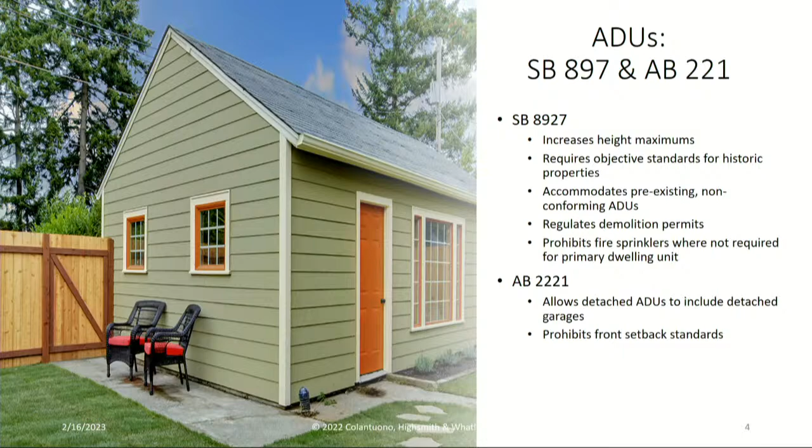Density bonuses. There wasn't actually a lot of amendment, I don't think there was any amendment to the residential density bonus. However, the legislature did reenact an expired provision, which is the commercial development bonus. So the residential density bonus is 65915.5. This one is 65915.7. Like I said, it existed, it expired, and now that we've reintroduced it, it also has a sunset provision in 2028, so it's also set to expire.

To qualify, a commercial developer must directly build affordable units, donate land for affordable housing, or make cash payments to an affordable housing developer. So now they're trying to get commercial developers to get in on the build lower income housing game. If they do that, they can get certain bonuses on their commercial development: for example, a 20% increase in max intensity under the general plan, a 20% increase in max allowable floor area ratio, a 20% increase in max height requirements, and other variances from the zoning ordinance and land use regulations.

The problem, as pointed out by the Legislative Analyst's Office, is that in the prior iteration of this, the one that expired, according to HCD, only 5 units were actually built under this law. So no one seems to be using it, and this new law that was reenacted is almost a carbon copy of the old one. Everyone's curious to see how this is going to be any different than last time around, but it's on the books.

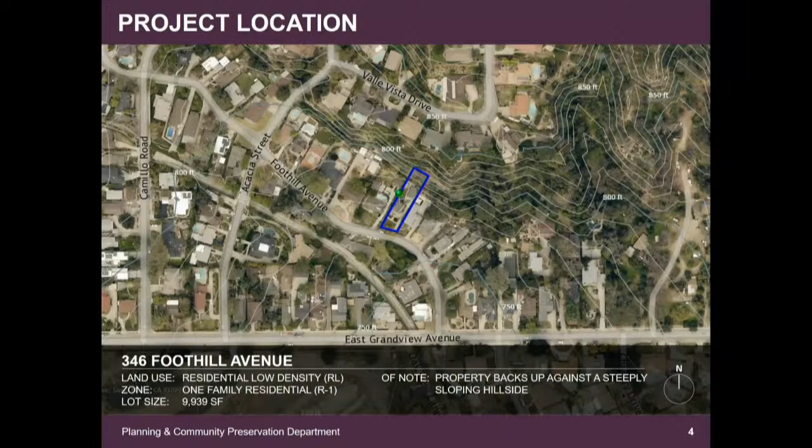Just a closer view on that hillside there, you can see there is a difference, 780 feet to 840 feet, approximately 60 feet increasing towards the adjacent property at the rear.

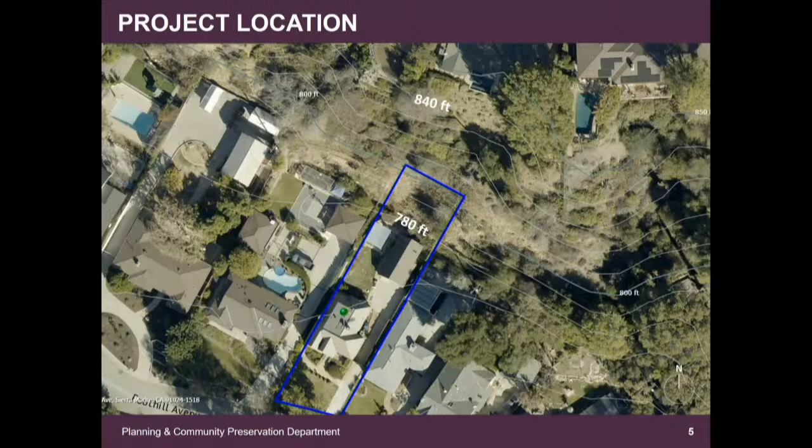As far as the summary for the project data, the design does propose a height of 29 feet 6 inches. This is down from 30 feet, which may be allowed with approval of a design review permit. But I want to note that this is a height measured from the lowest point of grade to the highest point of the building. So the height measured per code, which is from the lowest point of grade to a point one-third the roof height above the top plate, is 21 feet. This is up from 20 feet 9 inches, a very nominal amount.

This height does meet code as its method of measurement is as prescribed, because it is less than the 25 feet height limit. The proposed gross floor area of 3,206 square feet is down from the prior 3,222 square feet. It does not include the ADU of 558 square feet, which is permitted per government code and now city code.

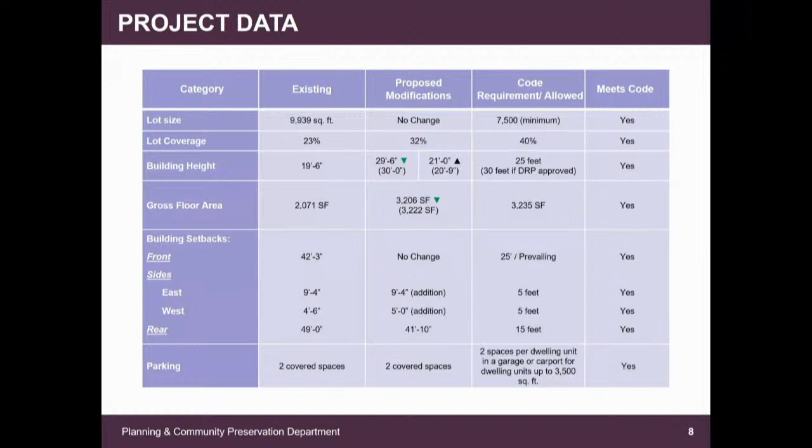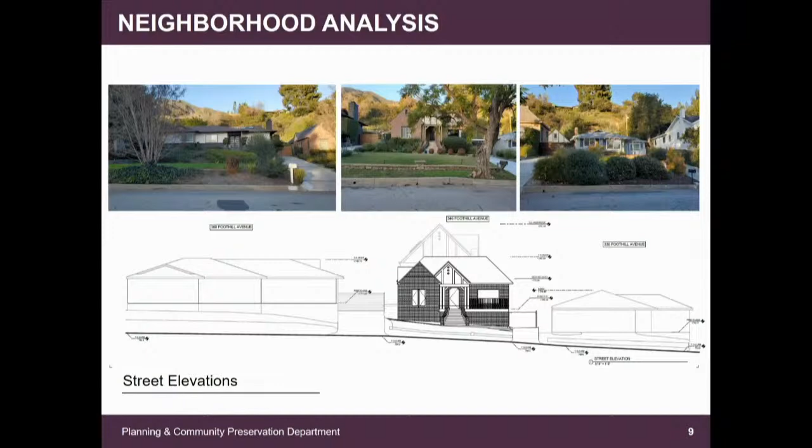There's further neighborhood analysis here. I asked for an elevation at the street, comparing neighboring structures at the street on Foothill Avenue. You can see on the left here is the neighboring home, above it is its photograph, and to the right of that is the other home on the other side, its massing and its photograph. There are additional photos of the neighborhood, included in attachment E of the agenda packet.

Moving on to the neighborhood analysis, comparing assessable floor areas. The building size is represented as habitable area as provided by the LA County Office of the Assessor. The subject property proposes a gross floor area, less the non-habitable area, of 2,753 square feet. That ranks it 6th in terms of building size amongst its neighbors, which is below the average of the top one-third and below the median of the top one-third.

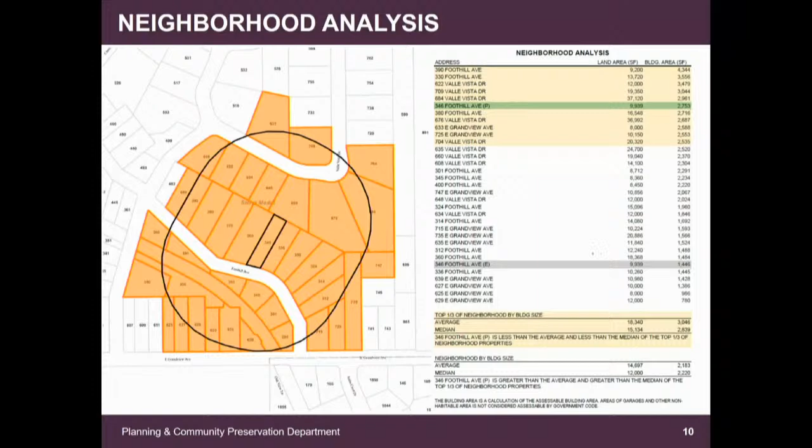Moving on to the existing site plan and topography. Highlighted here in orange is the area proposed for demolition and grading. The back 40 feet of the property is steeply sloped hillside, roughly 80% grade. Between the back of the garage and a chain link fence is a flatter raised terrace. West of the garage, the grade becomes much more gentle at an approximate 13% grade. This grade continues through the front of the property.

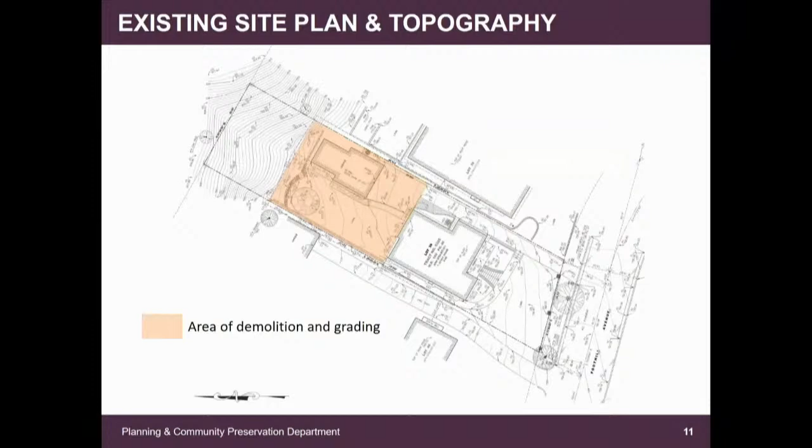I believe those arrows are conveying existing drainage patterns, but following my presentation, I think the applicant would like to clarify that.

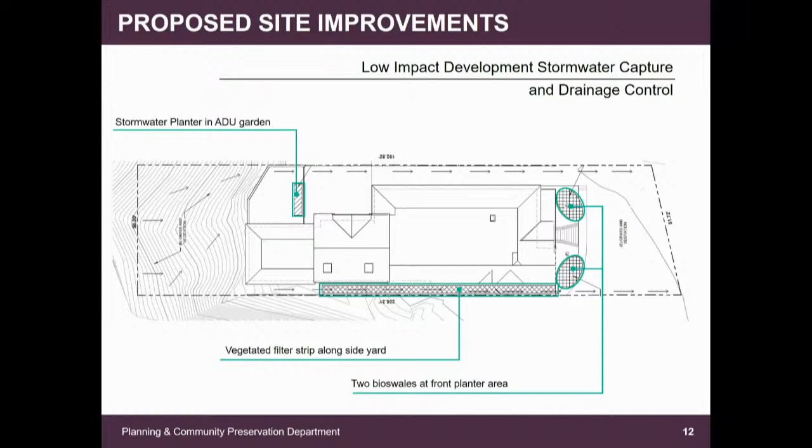All right, moving on to the demolition plan. This is exactly the same as it was in its prior submittal, where highlighted in orange is the demolition at the rear of the building of all those walls except for the southern exterior wall on the 5-foot side, and all the roof planes to be demolished.

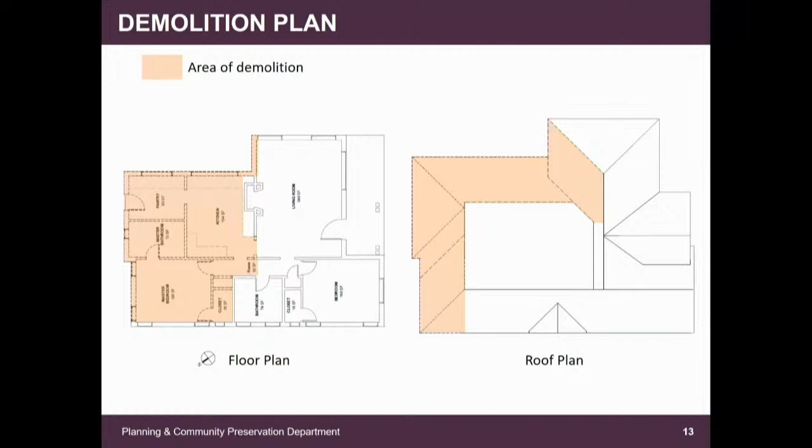Then a proposed site plan to the building footprint. Highlighted in green is the areas for addition. Those areas encompass a ground floor expansion of 739 square feet to the primary residence, a second floor addition of 595 square feet, an attached garage of 426 square feet, an attached ADU of 558 square feet, and a basement of 624 square feet, totaling less the ADU and the basement, 3,206 square feet.

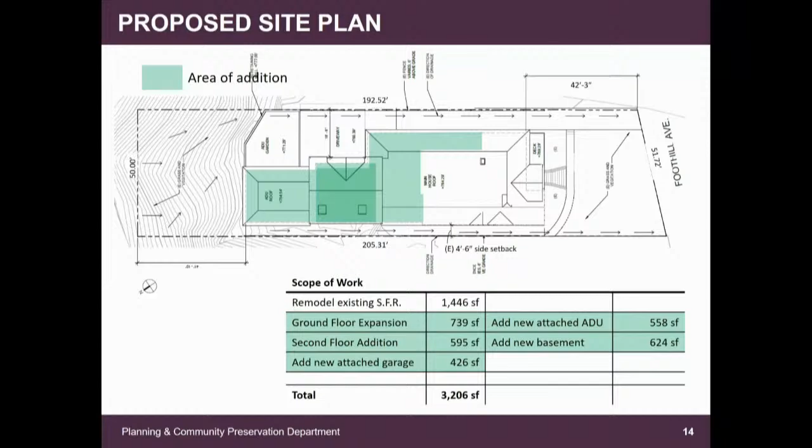This is just shown for reference. This is the previously proposed first floor plan.

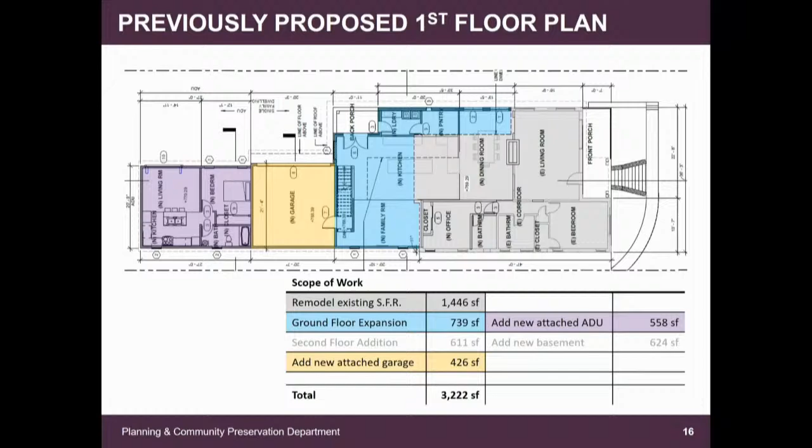Moving on to the second floor plan, we see that highlighted in blue is the 595 square foot portion. There's a little hatching area along the side portion. This is area with a floor to ceiling height less than 7 feet 6 inches, and thus not captured by gross floor area count. Additionally, the area of the stairs is already captured in the first floor, so it's not counted twice. In this floor plan program, there is simply a primary bedroom with attached bathroom and closet space.

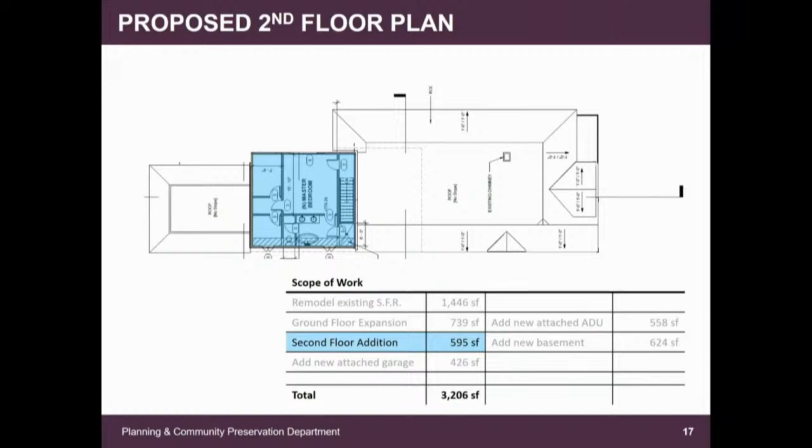Furthermore, the difference here in the new proposal is there's no roof deck anymore. So that's eliminated compared with its prior submittal.

Okay, moving on to the basement floor plan. This one hasn't really changed much in terms of its size, but its programming did change. We'll see, just because the way the stairs had to be reoriented, now the wine room and the storage areas are in different places. This is the previously proposed layout with the mechanical room and the wine room on the side end. In the new proposal, this has just been shifted in towards the front.

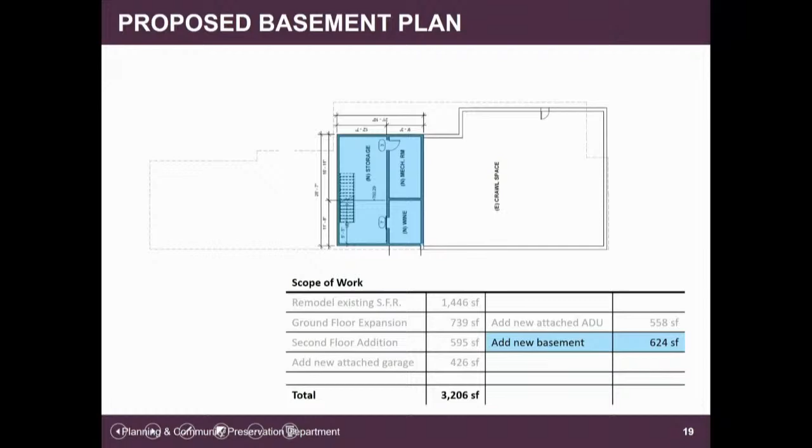Moving on to section elevations. The section on top of the slide is the proposed design with the western half removed, looking in at the eastern half's interior. Because the property is sloped at an approximate 13% grade, required angle plane is demonstrated for each of the sections below, showing that the proposed design falls under the required angle plane. You see that on the slide with the red lines that start vertically up 10 feet from grade and 45 degrees in.

Section number 2, cutting at the garage, demonstrates that the code-prescribed method for measuring height up to the first one-third of the roof height above the top plate is at 21 feet. Ceiling height in the second story volume is 14 feet. It's continuous with the interior ridge of the dormer, and interrupting the height of the interior ridge of the main roof with ceiling and structural ties.

As mentioned before, the ceiling height of the first floor addition measures 14 feet, primarily due to the ceiling terminating at the flat portion of the hipped roof.

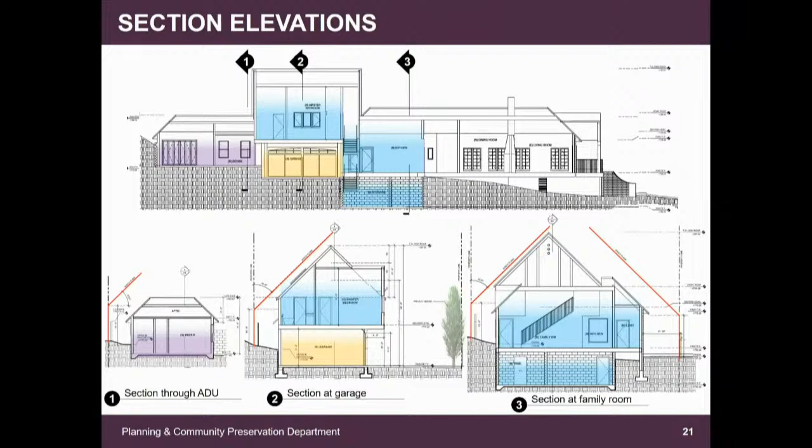There are very subtle differences in the other sections here, but I'll go over that a little bit later.

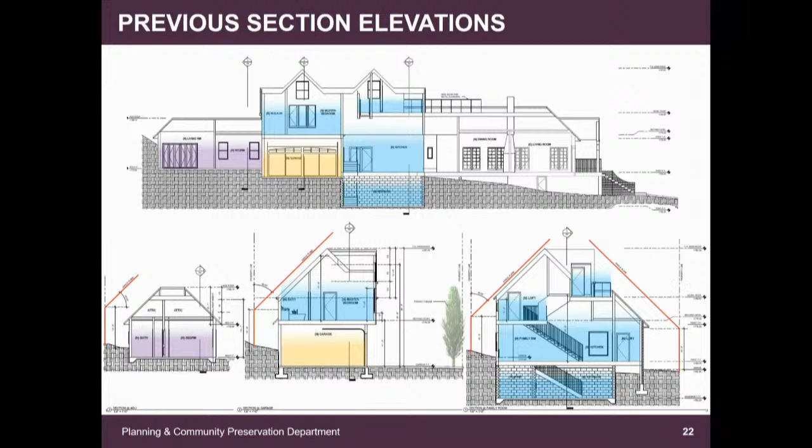Moving on to exterior elevations, one of Planning Commission's concerns was the second floor dormer shown here in the lower part of the slide, which intersects with the first floor and roof deck. That area has been addressed by eliminating the dormer along with all the building mass that projects towards the front. As you can see here, there's only one dormer, and it is standalone, not intersecting with any other building portions.

Additionally, you may notice that the roof massing of the ADU has been reduced in kind, more to the massing of the existing structure. So there is the previous, now proposed, more in proportion to the existing.

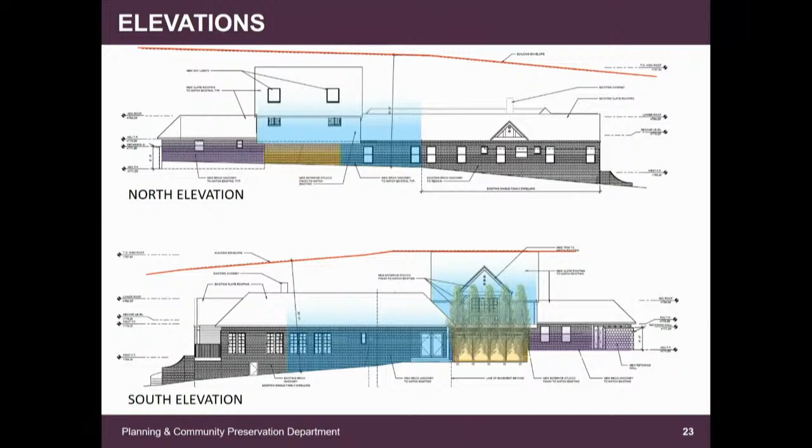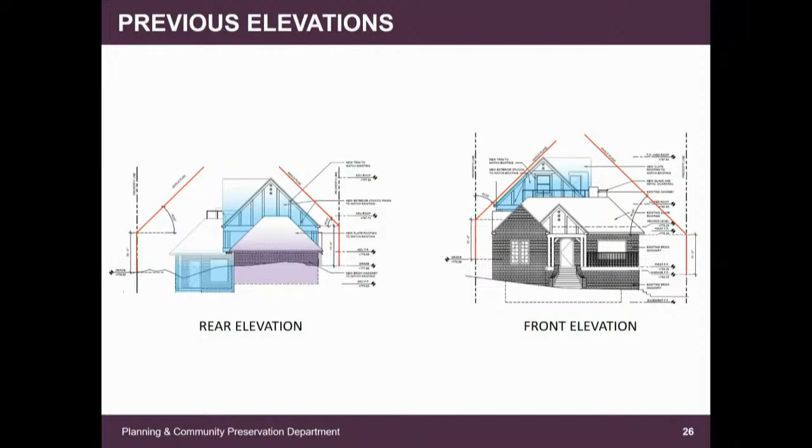Moving on to materials and colors, this has stayed the same since its prior submittal. The roof material will be a gray slate roof, matching the existing. There will be architectural timber Douglas fir treatment to match the existing, vintage red brick cladding, also matching existing clay architectural features for gable vents, anodized aluminum gray dual pane windows, and off-white troweled stucco cladding to match the existing exterior and color.

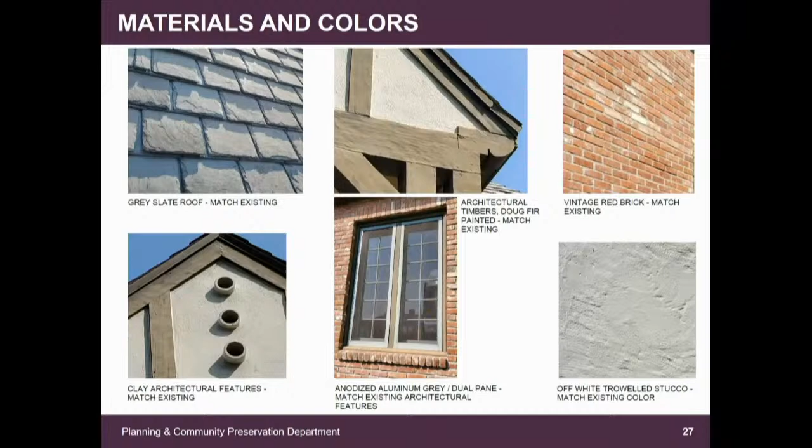Here are some further details of the windows and doors.

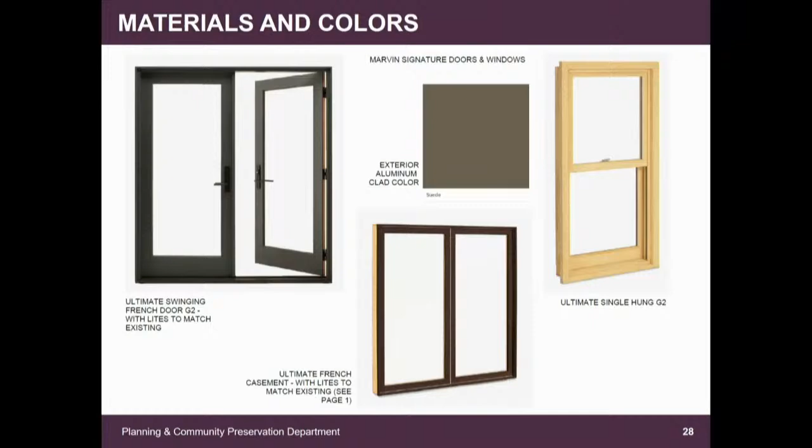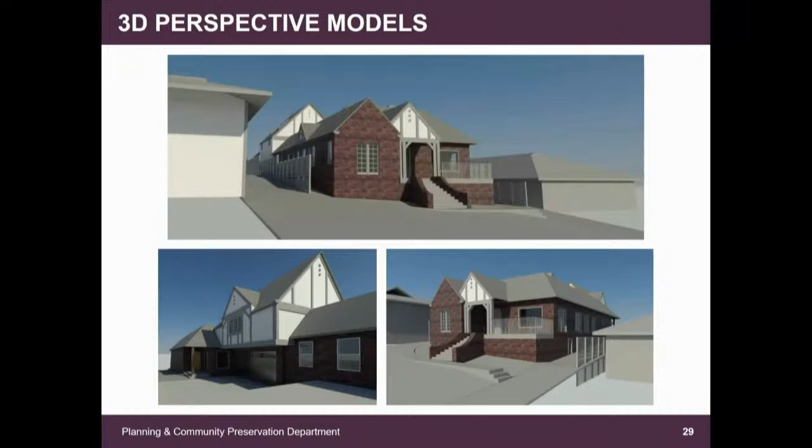Moving on to 3D perspective models, on the top of the slide is a 3D perspective model viewed from the street slightly north of the property. The lower left is up the driveway looking towards the front, viewing slightly towards the addition. The lower right is again the front, but further south on the street.

Moving on, we have some aerial perspective models that you can see the roof and massing from above.

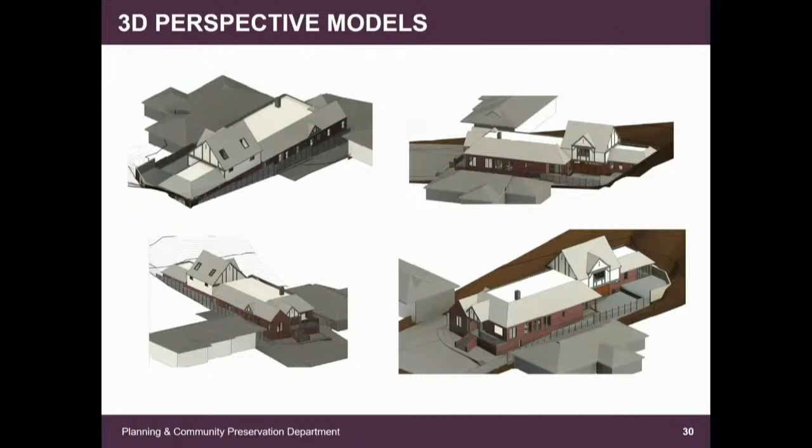And finally, findings for a design review permit. So all of the findings have been met. The proposed project remains single family in use. It meets all of the development requirements in accordance with the R1 one-family residential code.

The proposed additions are sited primarily at the rear, where adjacent properties further north are at higher elevations, and adjacent properties at the south of the subject property are at lower elevations, thereby siting the addition in a location with the least potential interference of use, possession, and enjoyment upon neighbors.

The proposed additions are compatible with the original Tudor architecture, where brick cladding, steeply pitched roofs, and half-timbered treatment of walls are used by reference to complement the original home.

The second-story volume is deeply set back from the front property, thereby having little to no dominance amongst the neighborhood.

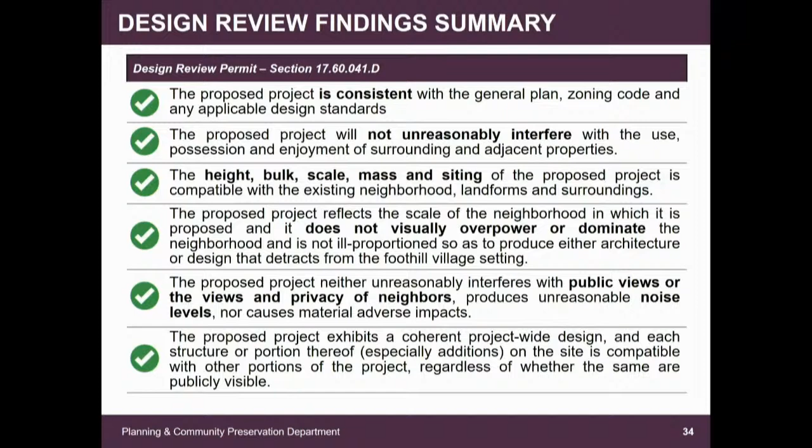There is a coherent project-wide design demonstrated by the proposed elevations and renderings, where it is apparent by details of the original Tudor style that have been continued consistently on each elevation.

The proposed design includes a height of 29 feet 6 inches, measured from the lowest point of grade to the highest point of the structure.

The proposed project is a custom design intended to expand the home and enhance its original Tudor style. The siting of the project is primarily located in the least graded portions of the property, extending towards the rear and against the base of a hillside, respecting and preserving the privacy and views for neighbors and occupants.

High quality materials intended specifically to enhance the existing Tudor architectural style are used throughout the building. This will also be required to meet high efficiency energy requirements. Water saving features are demonstrated by the proposed improvements addressing low impact development, stormwater capture, and drainage control.

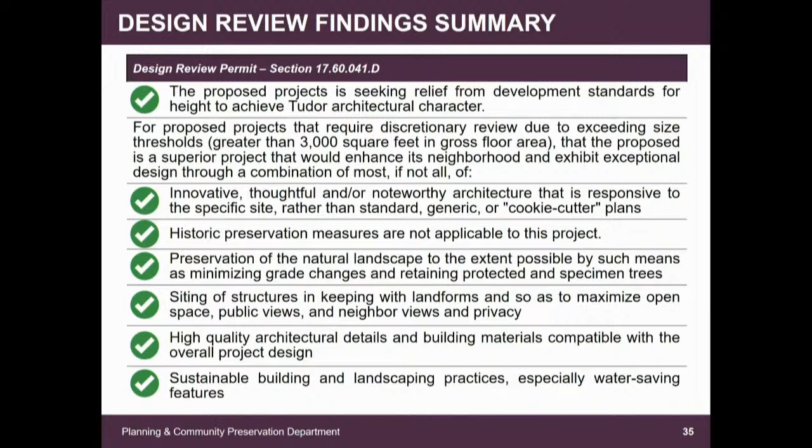And moving on to discretionary demolition permit findings.

There has been a historic evaluation report which concluded that the property is not eligible for listing as a local landmark. Demolition activities are intended for the purpose of expanding the home and do not change or alter the use of the land. Demolition will modify the exterior of the home and preserve a large portion of the front. Expansion will be consistent in design, material, and color to the original.

The demolition of exterior walls is necessary to accommodate the expansion of the home's interior floor space. The demolition will not encourage change of use of the property.

The public interest, convenience, and necessity are met where demolition is required to expand the home to accommodate a family of an average size, improve the land value, and by extent the value of homes within its neighborhood.

Alternatives before the Planning Commission tonight are to adopt the Planning Commission resolution as presented, approving the request for design review permit and discretionary demolition permit, subject to conditions of approval. The other alternatives are to adopt that resolution with modifications, deny the request and direct staff to prepare a resolution citing reasons and findings for denial, or continue the public hearing and provide direction to staff and the applicant.

Staff's recommendation to the commission is to adopt the planning commission resolution as presented.